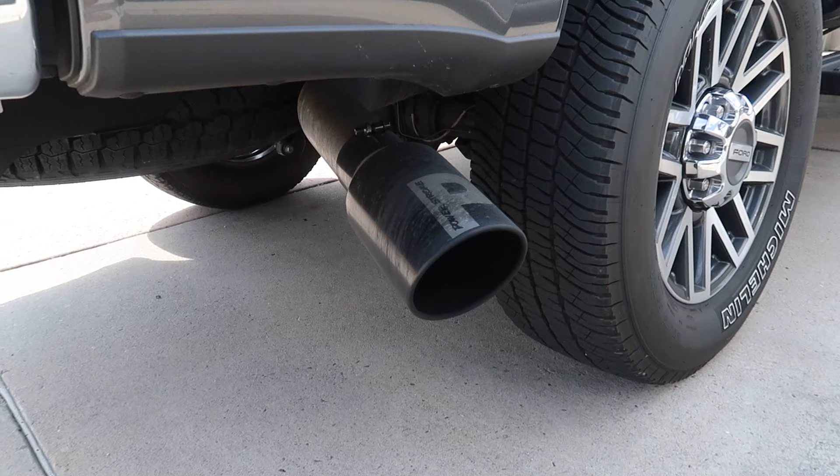My name is Chad. You guys are watching Yankee Wrenching, and today we're discussing variable geometry turbos. Slightly, we're more discussing the hiss tune or rumble tune aspect of it and how this is achieved, how the tuners are able to do this, how it makes your truck sound cool. I personally love the way that the hiss tune sounds. I also love the way that the rumble tune sounds.

Ford did a good job, in my opinion, with this and designing a setup that just works. They went function first. They chose it to function well before they chose it to sound well. Here's something a lot of guys don't know: the DPF and catalytic converter hold a lot of that good sound in. So they're basically just giant sound deadeners, and they suck up that good sound, that good noise.

And when you delete these things on your race trucks, you get this awesome sound of the variable geometry, the hissing sound just kind of coming through the exhaust, and it sounds like a jet engine. And it doesn't matter whether it's Chevy, Ford, Dodge, they all, with these new variable geometry turbos, have that amazing airplane-like sound. So we're gonna jump into discussing how we get that airplane-like sound and what you can do or ask your tuner to do.

If you don't like that, you can also go to what we call a rumble tune, which is more like if your truck had a fixed vane turbo. It's a good way to see what it would sound like, because that's essentially what you're doing, versus the variable geometry, and it's what really creates that sound. So let's jump into it.

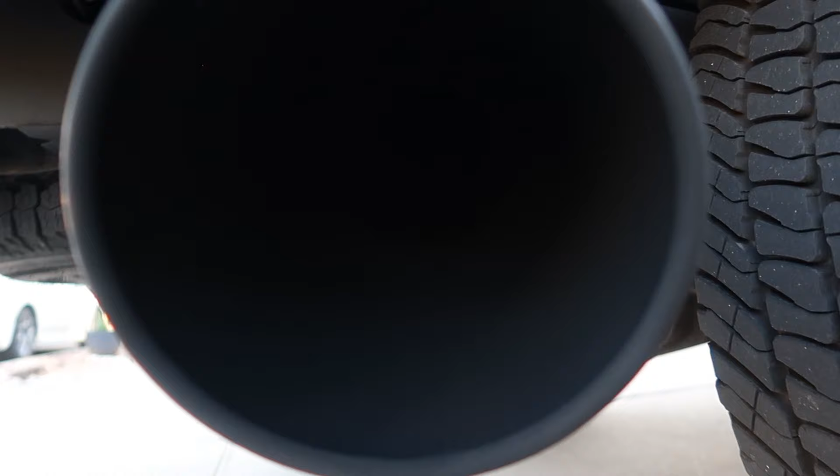So as you guys saw there, that is what we would consider basically a hiss tune. If you were to take your brand new 2017, 18, 19, to me those are all brand new basically, because you can still buy them new from the dealer. But if you took your brand new truck and you pulled the DPF and catalytic converter off and you put a straight pipe on it, that sound right there is pretty close to what you would hear to a T.

Now, this is because we have the variable geometry side of the turbo. It is actually adjusting the vanes on the turbo, and basically what it's doing is restricting that exhaust pressure. Instead of it being able to leave freely through the exhaust, it's basically getting forced through these small openings in the vanes and being directed right onto the turbine blade, and this really helps spool the turbo and make it efficient. So what you're actually hearing is exactly what I just said.

That air is rushing through this tight space, going onto the turbo, and it's a combination of the air rushing, giving you that hissing sound, coupled with the sound of the turbo actually spinning, giving you kind of a little bit of a spooling turbo sound. That gives you what we hear here, and you can get a little more aggressive than what I have, because this is a very stockish style tune.

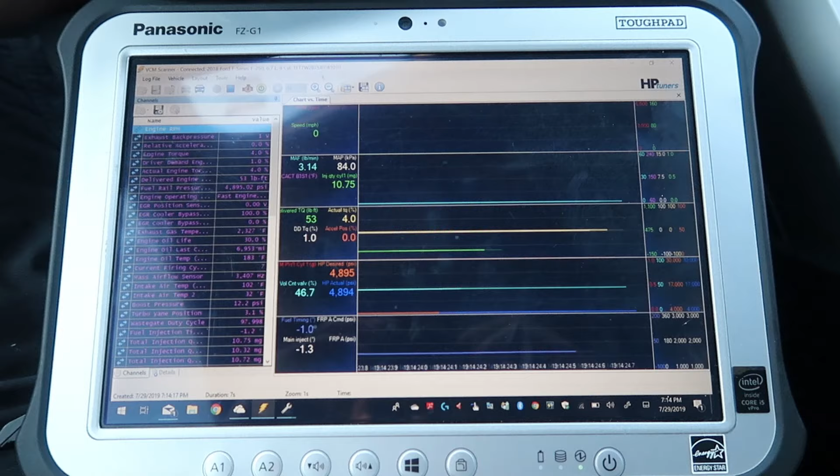Actually, I think this is exactly stock, and I'm gonna go ahead and show you the table at which the truck is idling, so you guys can see and know how much vane position we're theoretically achieving right now. Now, in order for you guys to understand this, I'm running a data log as we speak. So if you look here, here are all the tables that I have, and we can see fuel pressures right here.

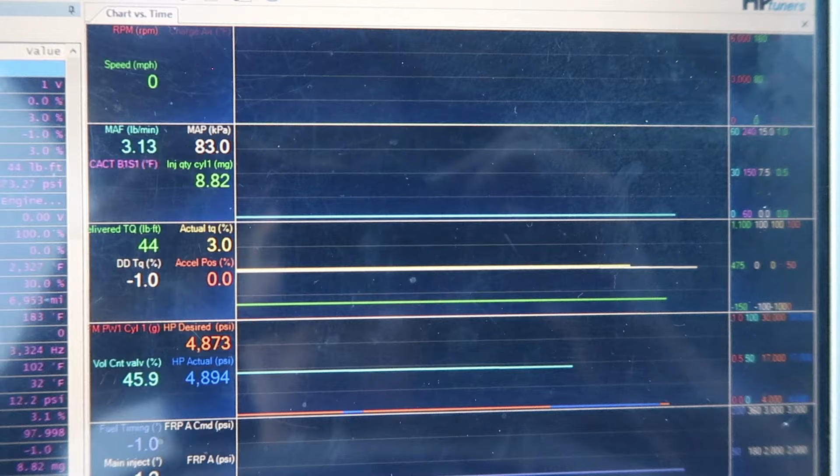We can see our torque demand, basically our actual delivered torque that the engine's producing, and then you can see here's our accelerator position. So we're obviously not on the gas at all whatsoever, but the main thing we want to look at is that right there is our delivered torque, and we can see it's around 43, 45. Goes up and down with the AC on, which I have on. So as the compressor comes on, the load will go up, and when it kicks off, you can see it goes down.

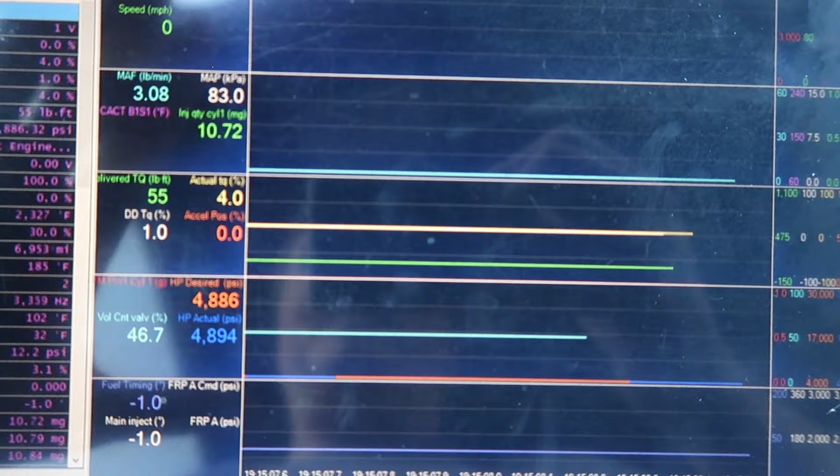But what I want to show you is that number. So we're hovering around 55 to 40. Let's just say we're hovering between 60 and 40. So now I'm going to stop that, and we're going to go over to our actual table. This is the table the truck is currently using.

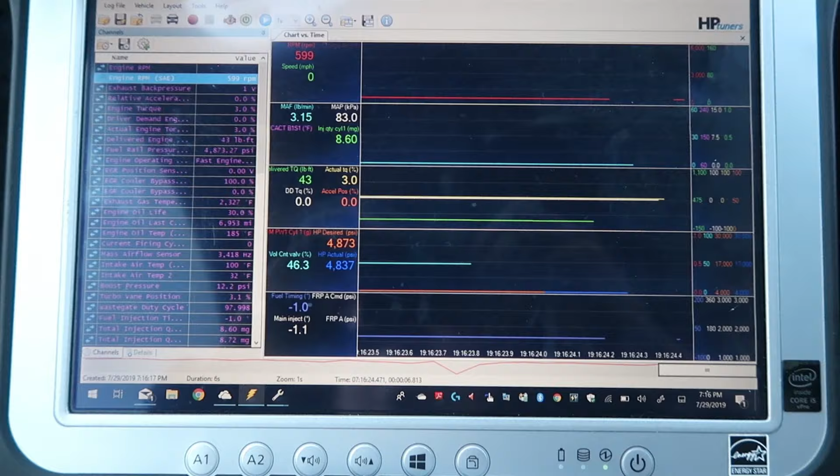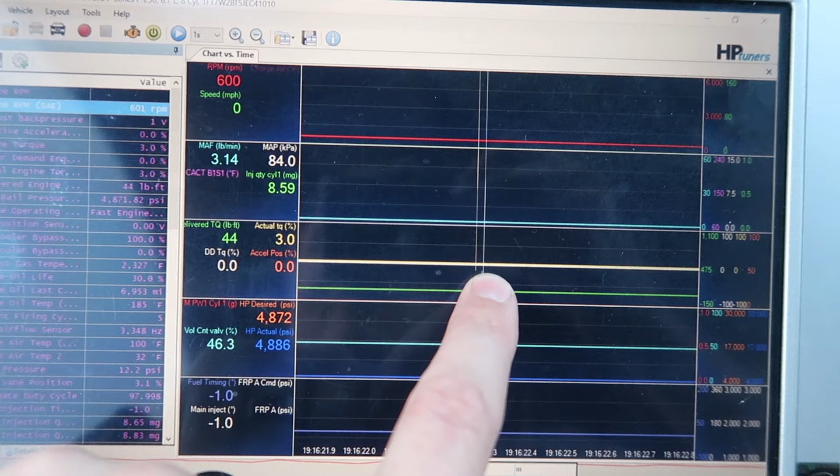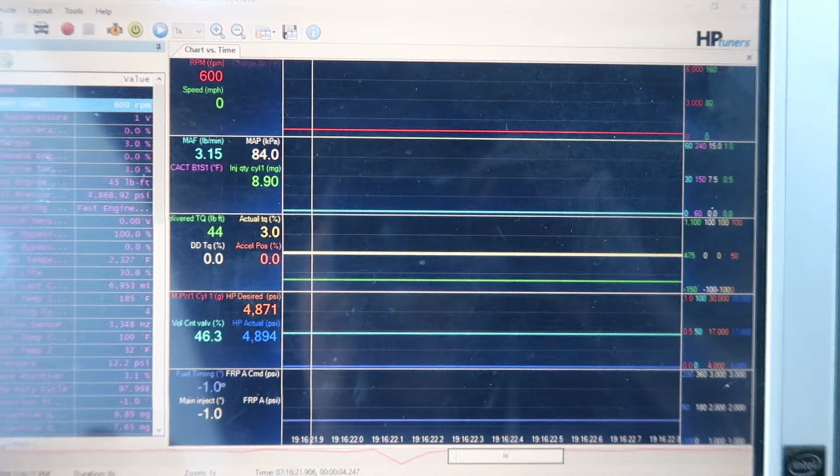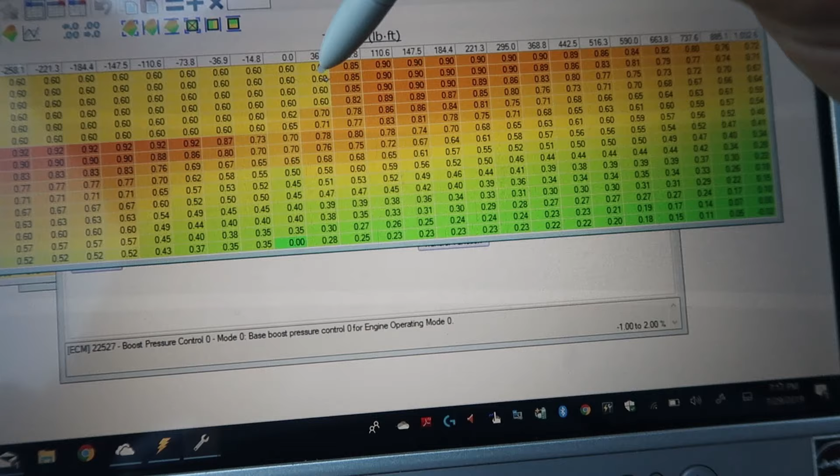So we're at 600 RPM with a 44 foot-pound torque demand. Again, we go back over to this table. So if we go over to 44 foot-pounds, it's going to be between 36 and 73. And then we have 500 and 600 RPM. So obviously, we're going to basically be at this second line down between these two tables. Technically, these four, as RPM kind of goes up and down a little bit, and you can see it's between 60 and 85%.

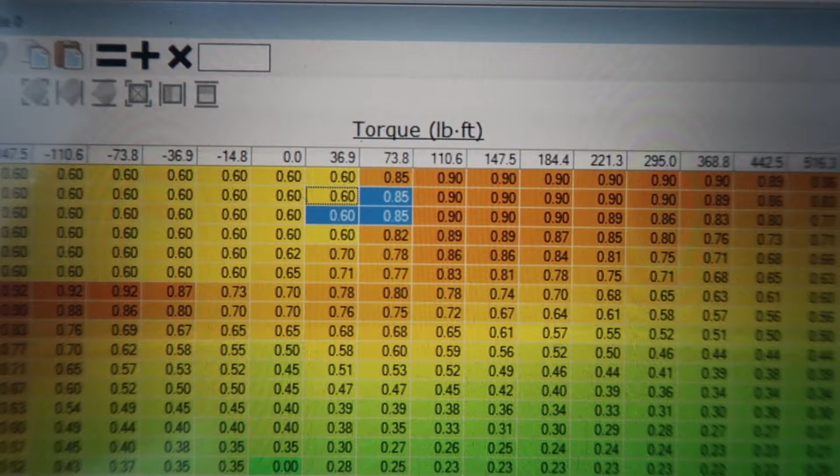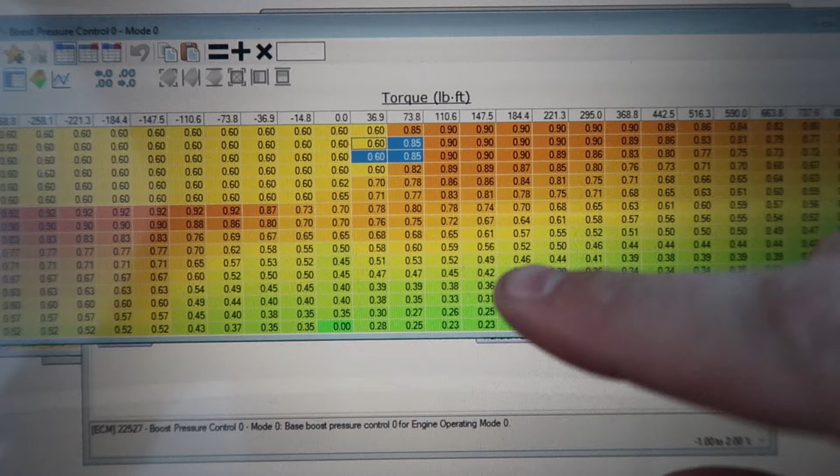Now some of you may say, how is it 60% or how is it 85? Well, if you look at this in a number setup of fractions, essentially 1.0 being 100%, well, 0.85 would be 85%. Same goes for 0.60, that would be 60%. Now this is basically how much force the truck is using on the variable geometry side of things. This is 60 to 85%.

Now, what these tables do, if you have 60 in one and 85 in the other, they blend or interpolate between the two. What that means is if you put a point at 60 and a point at 85 and you were right in the center of it, it would put a dot right between those two numbers, it would split it right down the middle. Depending on your tune, this is a stock tune, it's going to change and do different sounds.

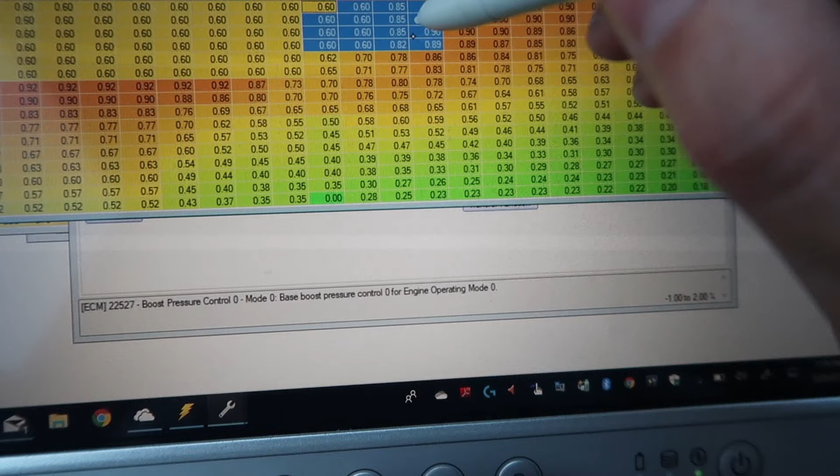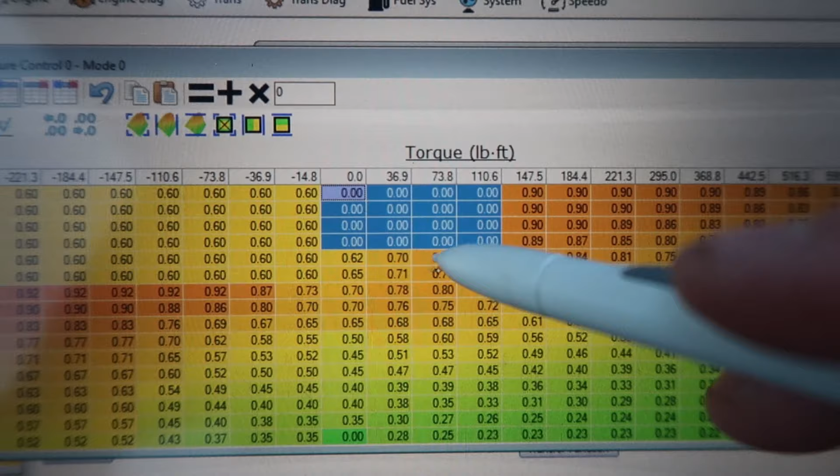So I'm going to just for fun grab this whole area even up to 110, and then I'm going to go to this table up here, I'm going to hit 0, we're going to hit equals, and now you can see all of those are 0 in that area. So it is going to be 0% on the variable vane, and this is going to give us a rumble tune. So let's go ahead and shut the truck off and flash this new tune-up in. So as this flashes, we're going to see just how different the sound can be. And like I said, this is going to be a rumble tune.

This is what tuners will call a rumble tune, and this is pretty close to your typical rumble tune setup. Now, you can achieve a rumble tune without being all the way to 0. I think I've gotten it done with around 15 to 25%. And it varies from how much timing I have, how much fuel, and basically how the fuel is delivered. But that's a whole different story, and it's a lot more complicated. I'm just trying to keep it simple on how this is done, yet be informative enough so you have a good understanding of what's going on.

Now, the number one question I always get is, why does your truck sound like that? What is going on? It sounds like an airplane, it's crazy. And it's very simple. Like I explained earlier, guys, it's strictly just the variable geometry part of the turbo, and it is really cool that we even have the capability to do that.

Now, the first of this technology I think came out, for Ford at least, on the 6-liter Power Strokes or International engines, and that was in what, 2002 and a half, or 2003, I believe, is when the 6.0 came out, and that's when they were one of the first diesels that I know of to have a variable geometry style turbo on them from the factory. They were pretty good, but they don't hold a candle to these newer 6.7 variable geometry turbos. They're a lot more advanced and a lot more efficient, along with being pretty big turbos from the factory.

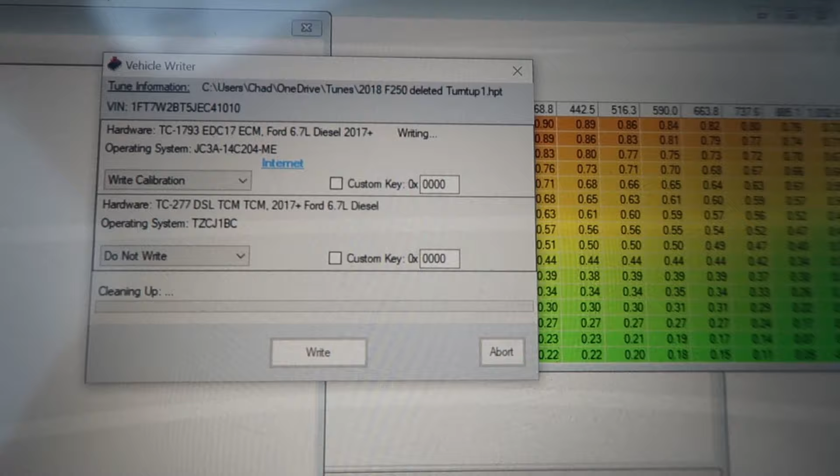So we just finished our tune-up, so you'll see here, it'll kick the screen back on. There we go. We're gonna go ahead, let it do its cleanup. It's all good. Now we're gonna go ahead and fire the truck back up and go outside and listen to this new exhaust tone that we got.

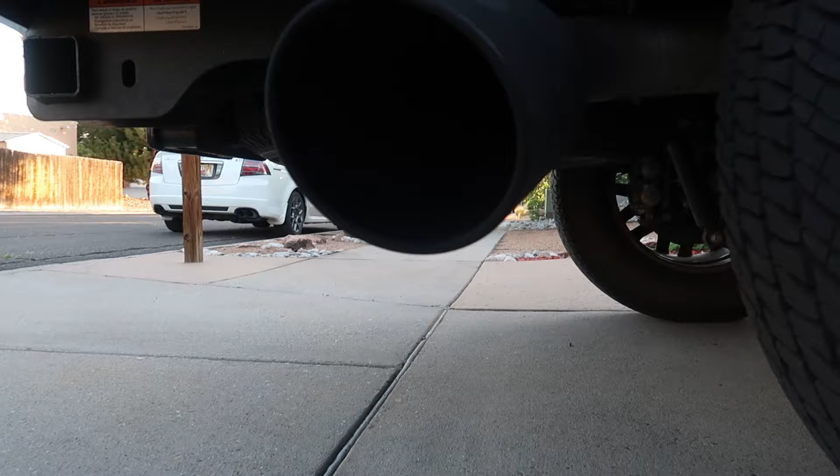As you guys can see, the truck no longer has a nasty hiss to it. It doesn't sound like a jet engine. It doesn't sound like an airplane taking off. It just sounds kind of like a stock truck, or I should say a truck that's not turboed. Now, this is what your truck would pretty much sound like if you had a non-variable geometry turbo on it. So a fixed vane turbo, as we like to call it, would sound very similar to this.

Sometimes even on those, they would have a little more of a deadened type sound because the blades have a little more aggression to them compared to this. Because it has the vane assist on it, they can go with a less aggressive vane, and that allows them to get a little more air by and just kind of open up. When you go to a fixed vane, you can actually flow more air by typically because we don't have these impellers blocking and doing all this.

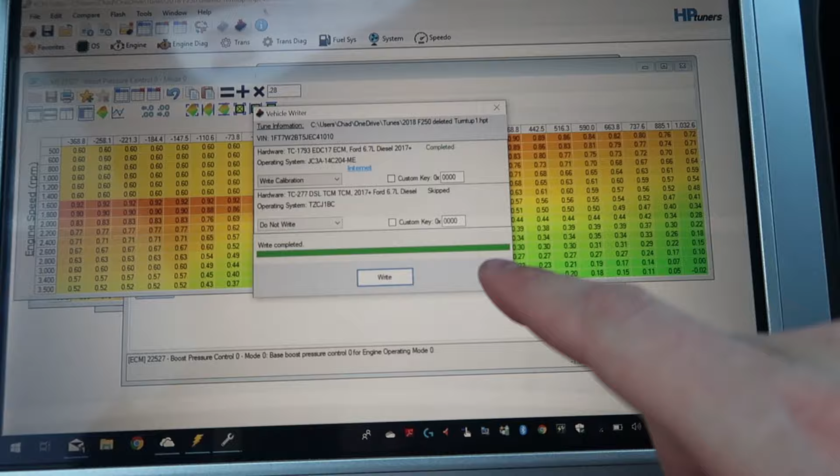So I wanted to show you guys what it sounds like, and just for fun, we're gonna go ahead and load a tune-up that's kind of in between. I think it's around like 25%. I might go right around there, maybe 30, and we'll see what that looks like. So let's load that, and then I'll show you guys what it sounds like. All right, our tune completed. We're gonna close that. You can see I set it to 28%, and now we're gonna fire it up and go outside and see what it sounds like.

So as you guys can see there at the end, it was at 28%, and then you heard the switch and it went to 78%. And I did that specifically because these trucks tend to switch between modes depending on how you have them set up, but I wanted to have a clear as day comparison of the two for you guys, so you could hear it from one to the next and basically do it live while the truck was still running. So you heard it there.

I think it sounds pretty cool. You go from that rumbly, throaty type tune to all of a sudden you get that jet engine, that real hissy whistling type. It's not even really whistling, it's more of a hissing, and that's the air running by the variable geometry blades, going directly onto that turbine to help spin that turbo. So I think it sounds pretty cool.